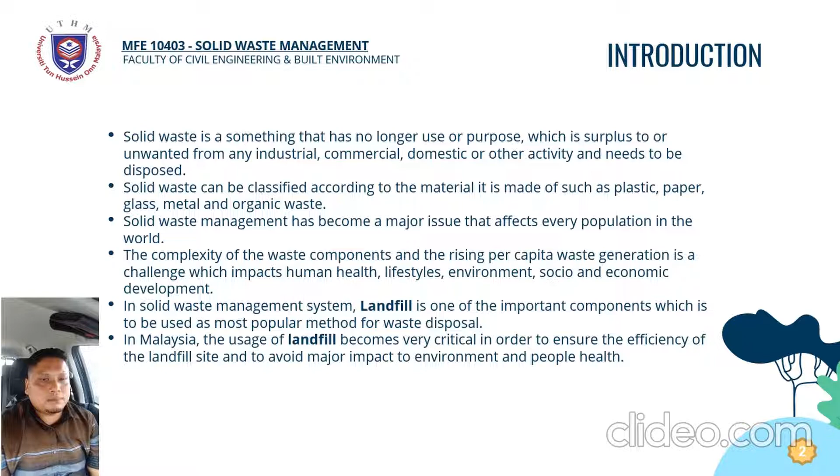For others, like composting, incineration, inert landfill, sanitary landfill, other disposal sites will be targeted to 8%, 16.8%, 9.1% and 44.1%. The table also indicates the proposed method to be used in 2020. Implementation of 3Rs will also be enhanced by 2020. This target was set out during the Malaysian National Strategic Plan for Solid Waste Management in August 2005.

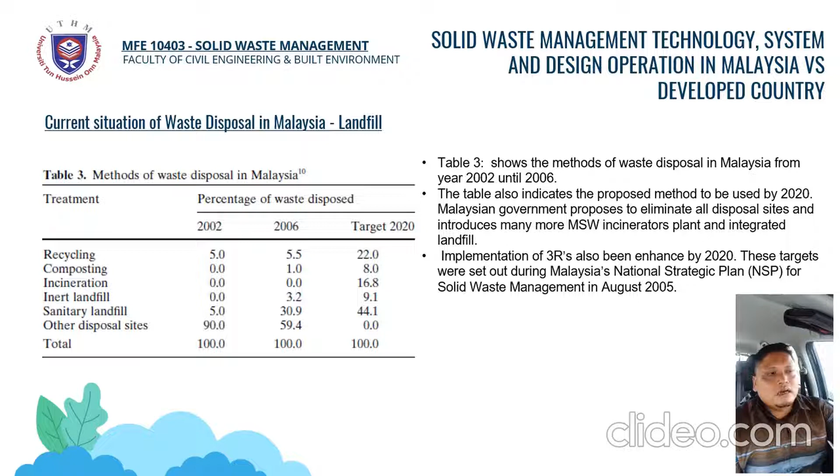For slide number 4, according to the most recent statistics available, almost 90% of waste was reportedly disposed to sanitary landfill, while only 10.5% was recycled.

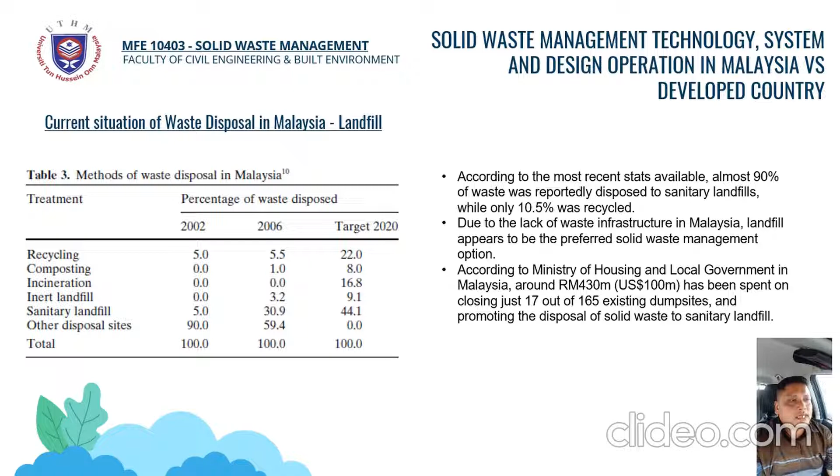Due to the lack of waste infrastructure in Malaysia, landfill appears to be the most preferred solid waste management option. According to the Ministry of Housing and Local Government in Malaysia, around 430 million, US 100 million has been spent on closing just 17 out of 165 existing dump sites and promoting the disposal of solid waste to sanitary landfill.

A landfill is the most common method used for MSW disposal due to the simple disposal procedure, low cost and landscape restoring effect.

Currently, almost 82.5% of waste collected is disposed at the dumping site, while other negligible portions are treated, reprocessed or dumped illegally. However, there are many issues related to this method of disposal, such as no proper engineering plan and landfill bottom liner system due to the lack of budget allocation for landfill upgrading work and poor enforcement.

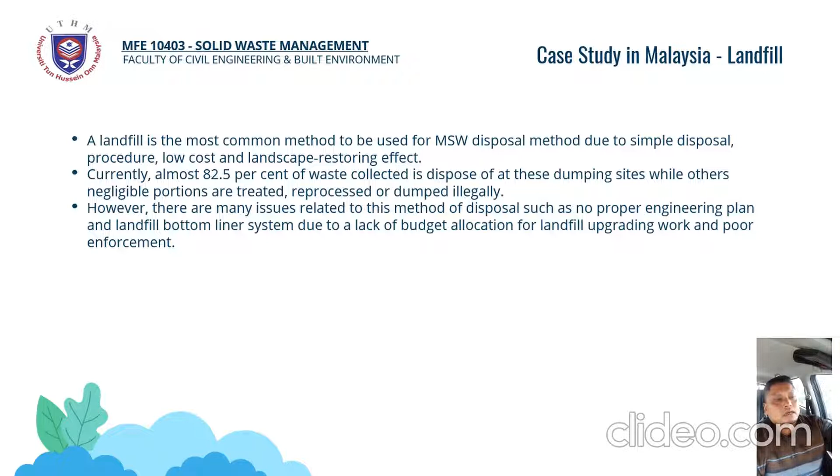Case study in Malaysia landfill: Cypark Resources Berhad was awarded as design and build contractor for the project of safe closure of 16 existing landfills around Malaysia. All these landfills were in a bad situation and bad for the environment.

The significance of this is the production of high concentration leachate and landfill gas that causes serious environmental, health and safety problems. Slope stability issues also contribute to the full closure of landfill. Most of the landfills have reached their maximum capacity of life cycle.

The chosen landfill for this virtual site visit case study is Pajam landfill, situated at Nilai, Negeri Sembilan. This landfill was under management of KPKT. The full closure landfill has a few features in order to mitigate and eliminate hazardous materials from contaminating the surrounding ecology and habitat, using a full capping layer, leachate management system, landfill gas management system and leachate evaporation system.

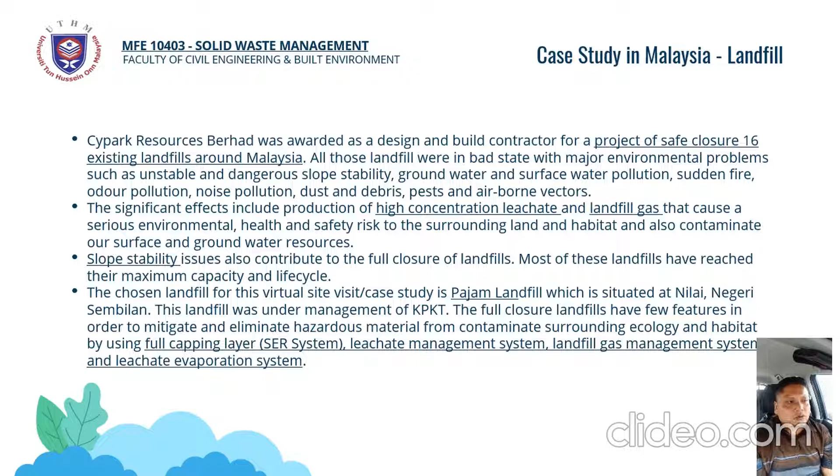They already started using some systems in terms of how to control or close the full landfills, which cannot receive more rubbish at that landfill area.

Right now, for that area, they have a system called the SER system. For example, as our case study, we chose the Pajam landfill at Negeri Sembilan, Nilai, Pajam. For that landfill, they are using a full capping layer using the SER system.

The SER system is a combination of technologies and engineering, including a series of site assessments, lab tests, design, and installation of a carefully engineered impermeable capping layer, leachate collection and management system, and landfill gas collection system.

Landfill capping does not lessen the toxicity, mobility, or volume of hazardous waste, but it normally limits migration of leachate. Landfill capping is most effective where most of the underlying waste is above the water table. The capping must restrict surface water infiltration into the contaminated subsurface to reduce the potential for contaminants to leach from the site.

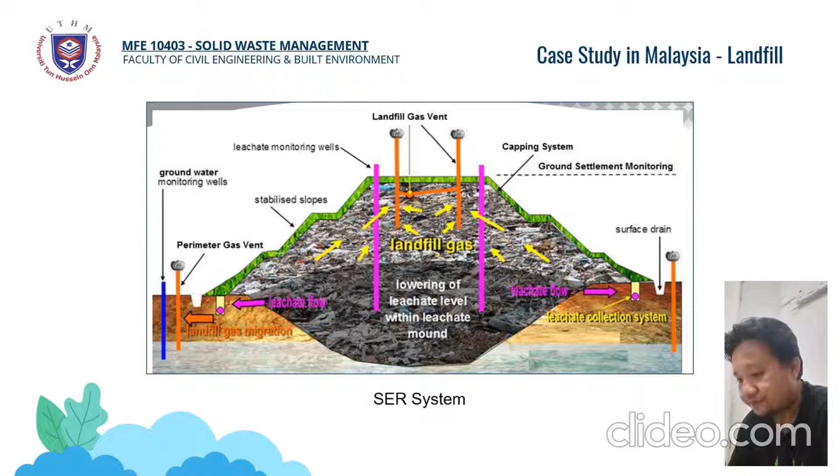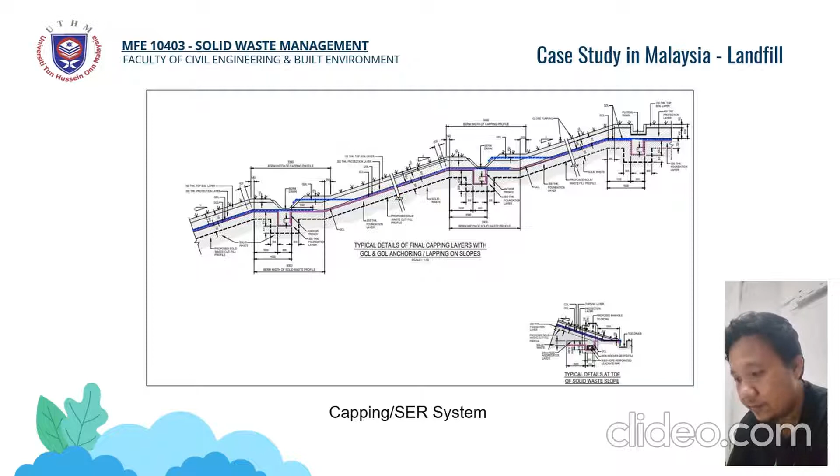This drawing shows cross sections of how they installed the GDLs and GCLs at the landfill area. This capping drawing was obtained from the consultants of this project, Zaidon Links Sdn Bhd, who provided these details as our reference records.

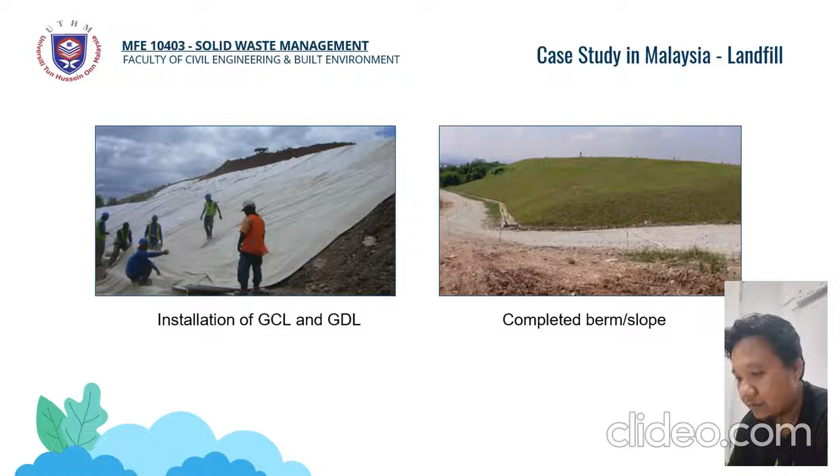This is the installation of GCLs and GDLs at the landfill area, and another photo, Figure 7, showing the completed berm slope, meaning this is the post-product.

For this site, they also have a leachate management system. It consists of a leachate pipe network, leachate treatment plant, leachate pond, leachate manhole, and a leachate pump station. This system will contain and treat leachate before release to a river. The picture below shows the leachate management system for the Pajam landfill restoration project in Nilai, Negeri Sembilan.

These photos, Figure 8, show the leachate pond. All the leachate from the landfill area is channeled to this pond using the leachate pipe and manhole system along the landfill area as a collection pipe.

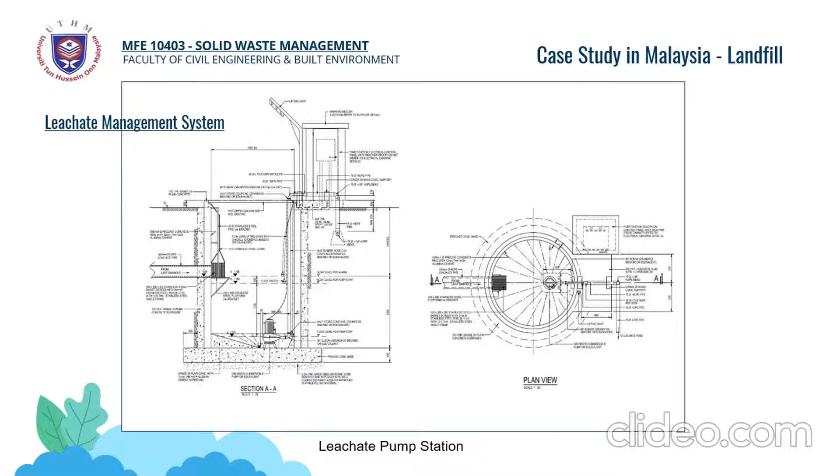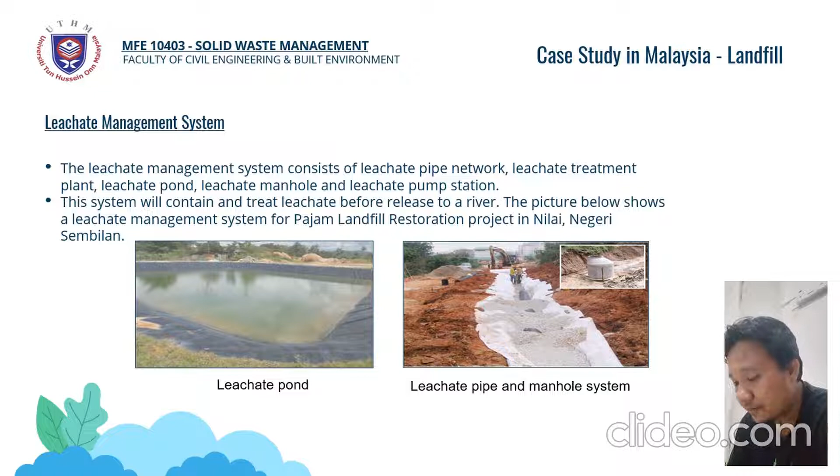Again, the leachate management system consists of a leachate pipe network, leachate treatment plant, leachate pond, leachate manhole, and leachate pump station, containing and treating leachate before release to a river at the Pajam landfill restoration project. Figure 8 shows the leachate pond, where leachate is channeled via pipes and manholes, and this shows the leachate pump station at the Pajam site.

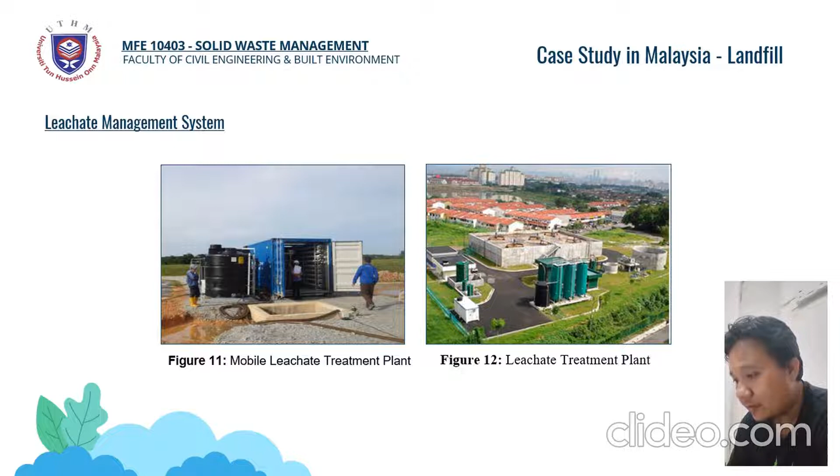This container is basically a mobile leachate treatment plant, and another one here is a sample of the leachate treatment plant.

Now for the landfill gas management system. This system is used to extract landfill gas generation and manage effectively the harmful emissions to the atmosphere, and to prevent subsurface migration. The landfill gas management system constructed will use either a passive gas venting or an active extraction system. Methane gas is captured and converted into electricity, while the remaining gas is flared. Electricity generated from the site is sold and supplied back to Tenaga Nasional Berhad (TNB).

These are photos of the landfill gas management system. As mentioned, they installed the pipe directly under the landfill area. On top, they use a kind of vent to distribute the gas, making sure the gas is not buried under the landfill, because this can cause an explosion at the site.

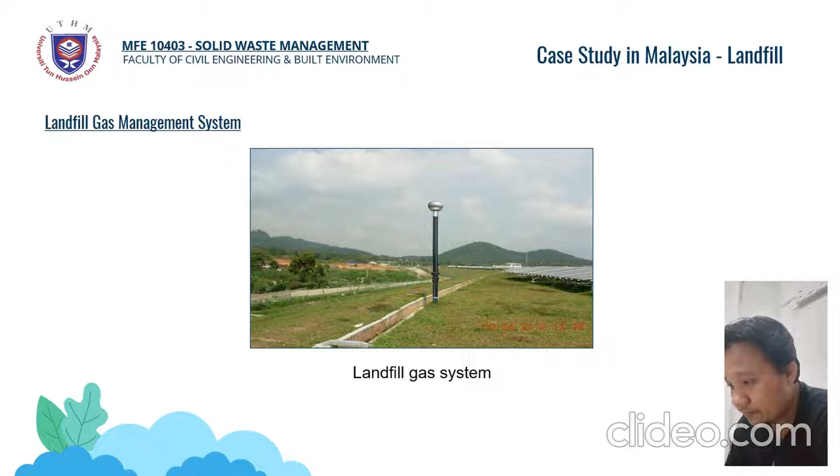Okay, this is the rest. This one is more on comparison. Okay, the next one is what we have here is in terms of how as a comparison.

Basically in Malaysia, our overall method for waste disposal still uses landfill as our main method, meaning all the rubbish collected by the rubbish collector will directly be sent to the landfill for dumping.

Different from other countries, we take the nearest one, Singapore. In Singapore they only have one active landfill, but that's based on the capacity of the country. Compared to Malaysia right now, we have at least 150 to 160, almost 180 active landfills. That's the recorded number, but illegal ones are a different story.

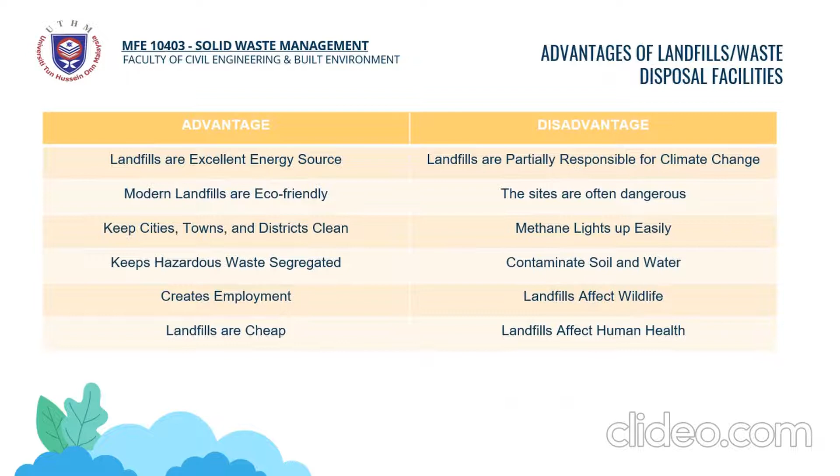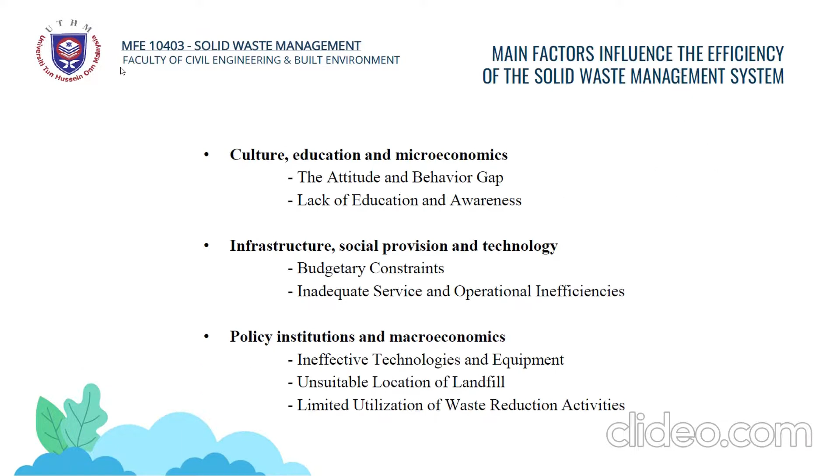I will continue for the third part. My name is Chan, representing this group.

The main factors that influence the efficiency of the solid waste management system can be grouped into three. The first one is culture, education, and microeconomic factors. This is the difference in attitude, behavior, education background, and awareness level between different groups of people, or we can say developed country or not developed country.

Then the second one is infrastructure, social provision, and technology. This is more related to budgetary constraints. Where we have an incineration system, it will need a higher budget and also skilled workers for maintenance and operation of the system.

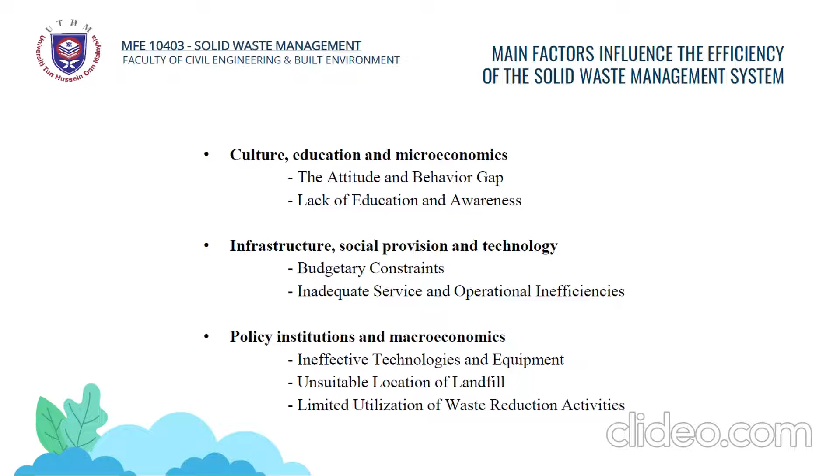The last one is policy institution and macroeconomic factors. This is regarding ineffective technologies and equipment, unsuitable location of landfill, and also limited utilization of waste reduction activities. So moving to the next one will be the advantage of landfill waste disposal facilities.

The left one is the advantage, and the right one is the disadvantage. For the advantage, landfills are excellent energy sources. Modern landfills are more eco-friendly. They keep the city, town, and district clean, keep hazardous waste segregated, and create employment. And landfills are actually a cheaper option.

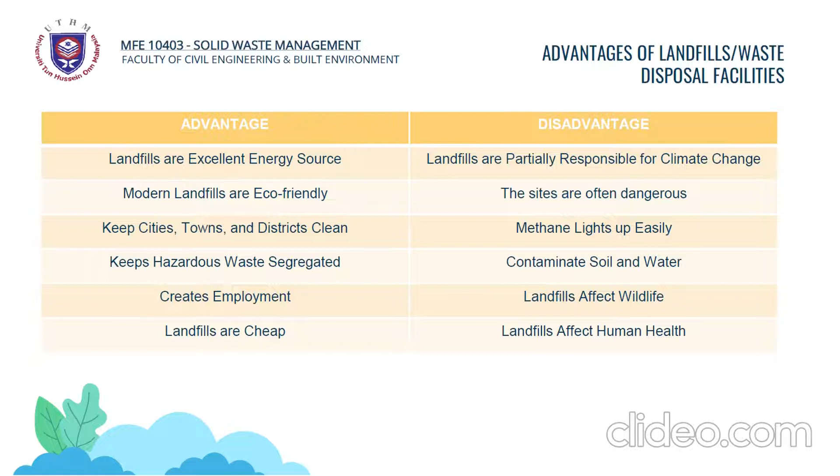For the disadvantages, landfills are partially responsible for climate change because the sites are often dangerous, they have methane, and they can light up easily. Then there's also leachate, which may contaminate the soil and the underground water system. And landfills surely will affect the wildlife and also human health.

Then the approach to improve the current landfill waste disposal facilities. The first one, our opinion will be we have to raise awareness, particularly on waste separation and segregation. We have to instill this habit into the public, so they don't just mix everything together, and that will clog up the system.

Next is the improvement of collection and management of solid waste. Then we also have to encourage the 3R, which is recycling, reuse, and reduce. Then we also have to design more engineered landfills, not just dump sites. Then the location of the landfill also has to be studied very thoroughly.

Groundwater monitoring is also crucial, so that we don't have pollution of the groundwater, and the landfill operation has to be optimized, or incorporated into different systems so it can achieve better results.

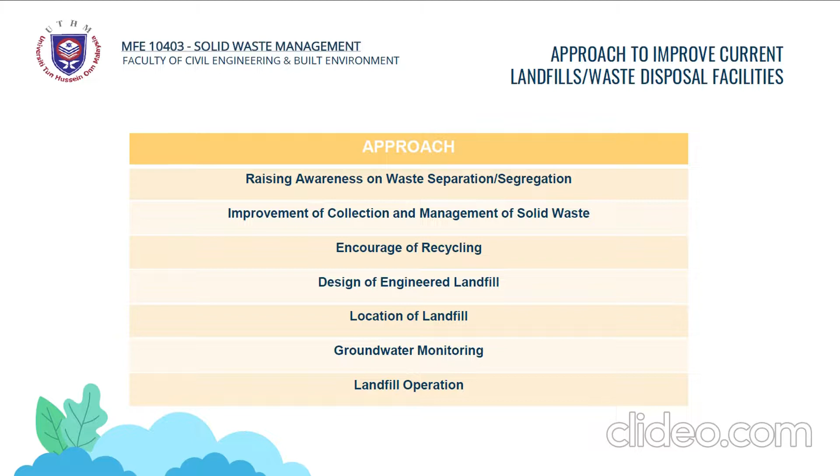So as a conclusion, waste disposal has a significant impact in many countries in the form of environmental, social, and economic aspects. So to protect all those aspects, a comprehensive approach is required to be implemented in managing construction waste.

So there are many efforts that can be taken in managing waste disposal, including generating a proposal for future studies focusing on raising awareness through effective training in proper waste management methods and proper planning of waste disposal methods, such as introducing more engineered landfills.

Upgrading and improving facilities to support waste management, particularly in the area of recycling, is necessary. Government enforcement is necessary to ensure that requirements and standards are met. The last one is to reach sustainable development. The waste management issue should be made public from grassroots level, implying the participation of all parties. Thank you.